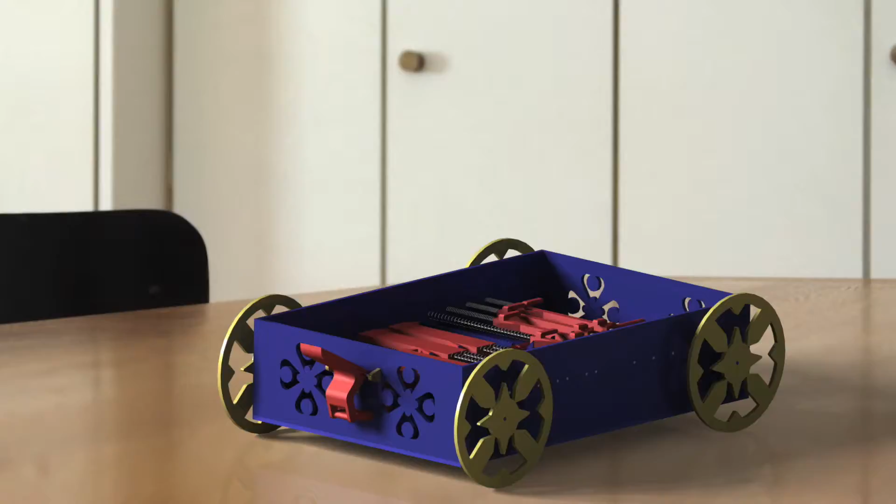Hi, I'm Daniel, and with my colleagues we will be presenting our concept vehicle for the mechanical experimental engineering assignment. The repeatable vehicle we designed will be powered by energy stored in a series of springs. The linear movement from the springs will be converted into rotational using the rack and pinion principle, with the pinion acting as a shaft for our car.

Since our shaft will be positioned longitudinal to the car, we will use another set of gears to transfer the movement to the wheel's axle. This explains the forward movement. Let's have a look how the car is going to do the return journey.

As you can see in the image, we are using a pair of springs for every rack that moves the car forward. In reality, only one spring per rack would be enough to push you to the target, but we are using additional springs to load the rack for the return journey. As the shaft rotates, it is pulling the single spring racks into the opposite direction of the first one.

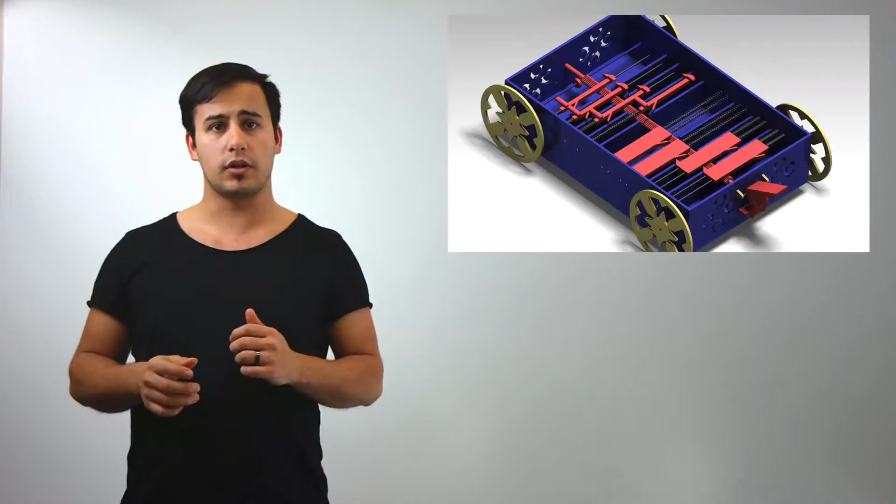You might wonder how does our vehicle know when it hit the target so it can return to the origin. Let's have a look at that. By now you probably noticed that the shaft is divided into two sections. One is for the forward movement and the second one is for the return. They are initially linked together by a gear, but there is a compression spring forcing the half of the shaft to separate from the other half.

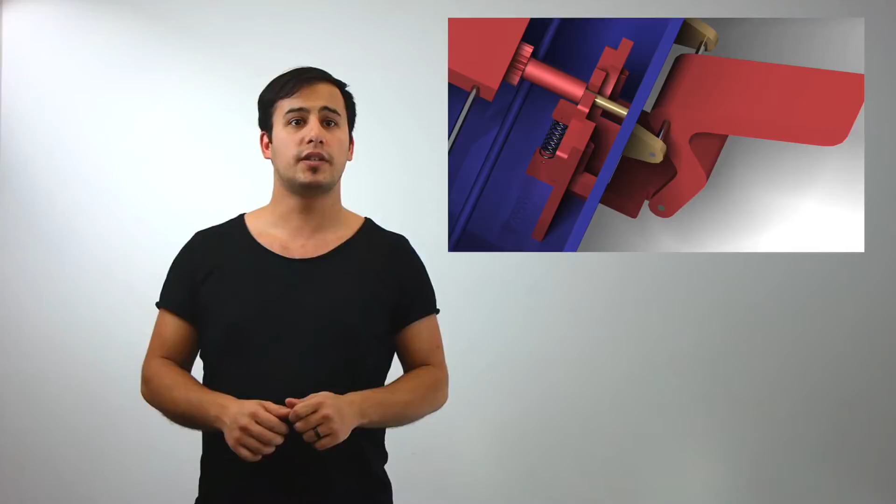The separation, however, is blocked by a small latch at the front. This latch is being pulled downwards by an expansion spring. Again, this downward movement is blocked by a release mechanism, which is activated when the target hits the wall. This means that when the target is hit, the half of the shaft driving the car forward is disengaged, leaving only the single spring racks connected to the wheel's axle, making it move backwards to the departure point.

Hi, my name is Luis, and I'm going to speak about how the forces are going to interact in our vehicle. Roughly, half of the energy stored in the forward springs is going to be used to move the vehicle to the other side. We have added a calculated efficiency of 80%. That is why we need some more energy in the forward side to compensate for this lost energy in the transfer.

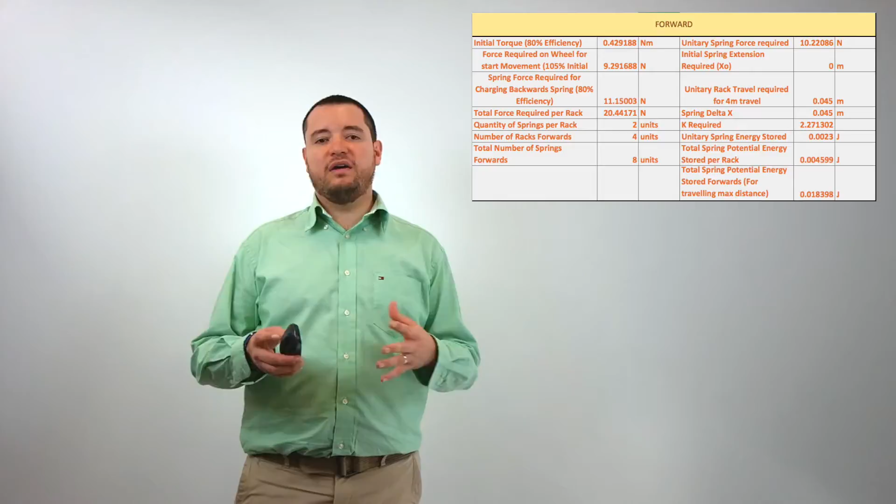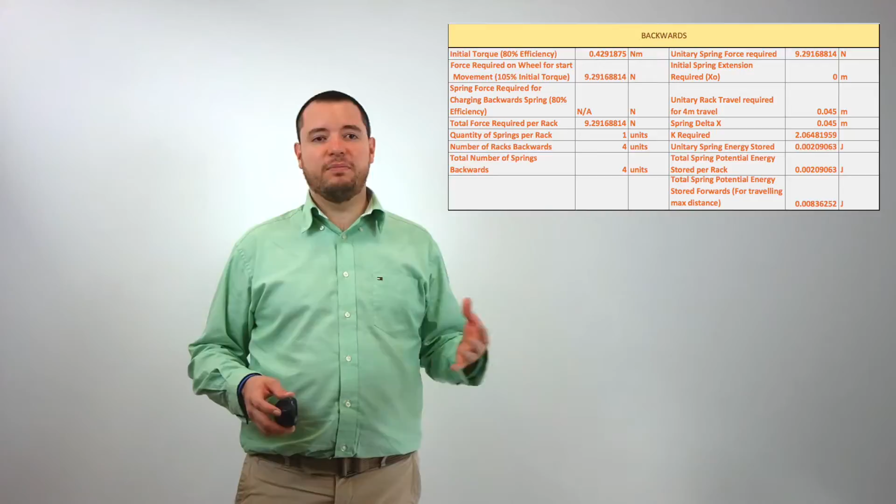Calculating the initial torque we need in both ways and the maximum distance we have to achieve, we have come to this table and made a selection of the springs we can use for the vehicle. Changing some of the variables in our database, we can achieve different distances in powered vehicles with different masses. With a connection ratio of 2 to 1 between the crankshaft and the wheel axle, we will achieve 2 turns of the wheel for each turn of the crankshaft.

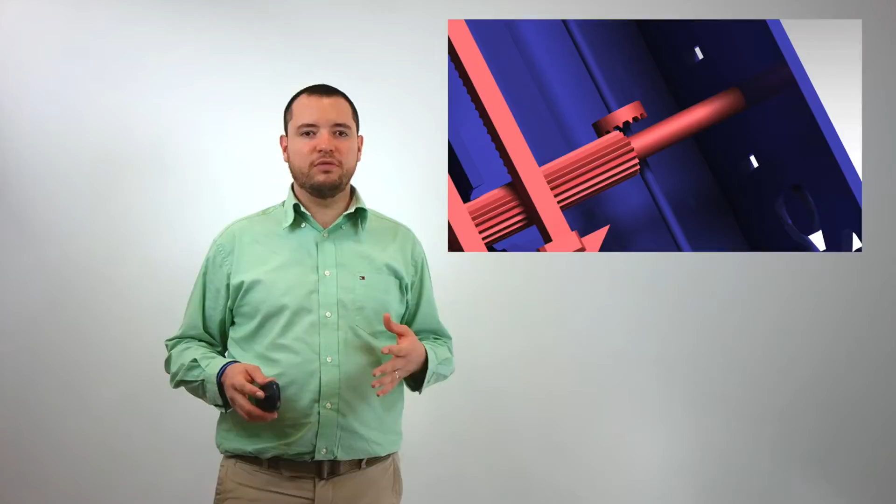Using mechanical connections and reducing the transmissions, we improve the efficiency of the energy transfer, which is the basic principle of our model. Once we can make a test in our model, we will be able to improve this efficiency and have more certain calculations.

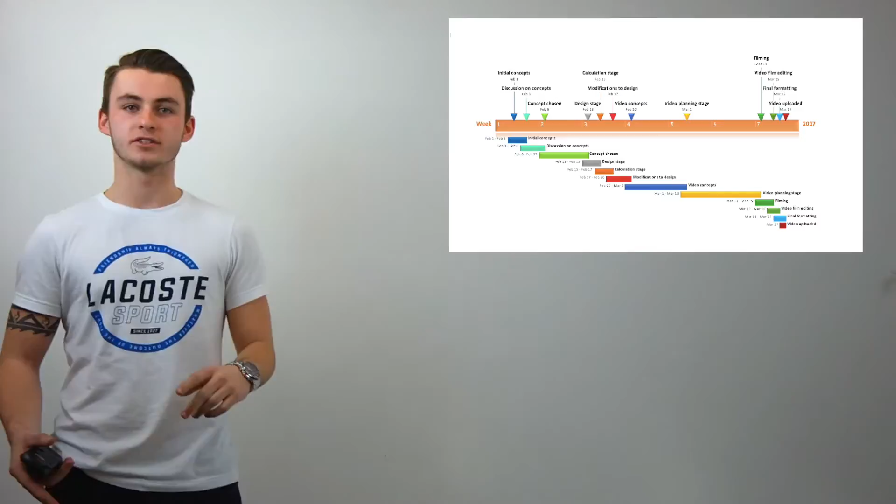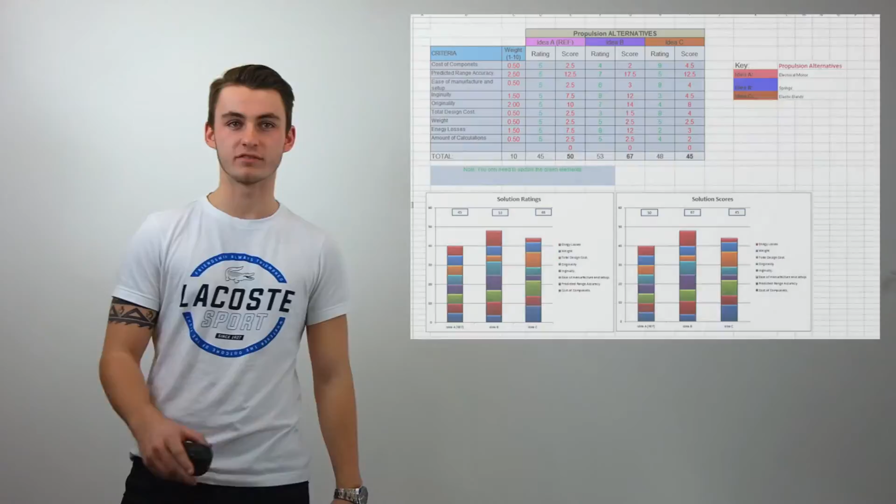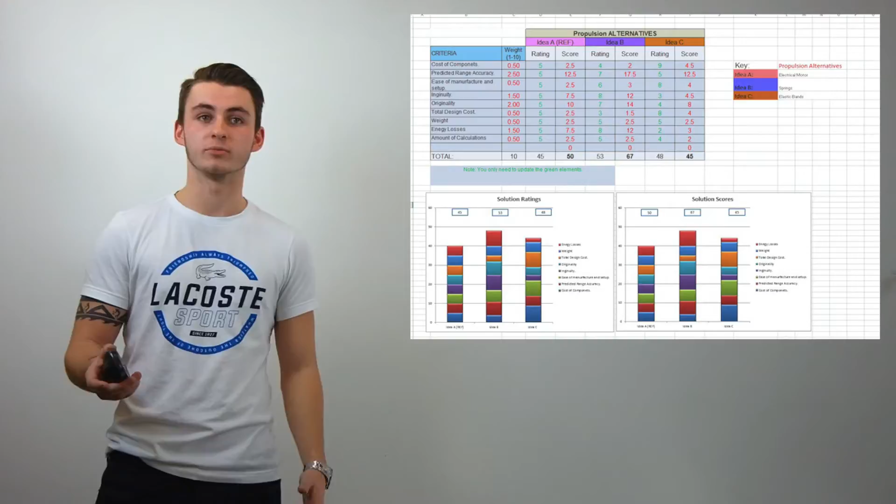Hi, my name is Elliot and I'm going to be talking you through the design selection process. In our initial brainstorm, we highlighted 3 possible means of propelling our vehicle. Our options were to use an electrical DC motor, the elastic potential energy in springs, or elastic bands. In order to determine which method would be the most effective in relation to our design brief, we discussed advantages and disadvantages as a group, allowing us then to make a selection table that can be seen behind us. That's allowed us to compare each method to a set of criteria which came directly from our brief.

And as you can see from the results, the method of propulsion that was calculated to be most effective was to use springs, because of its properties allowing controlled release of energy with accurate calculations, enabling us to achieve our set parameters. Using elastic bands would have provided an erratic and less controlled release of energy, which would result in reduced efficiency due to energy losses.

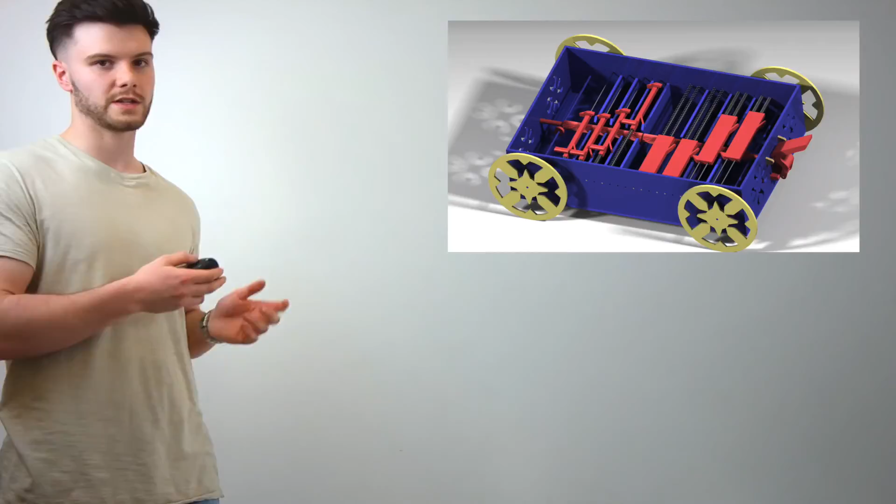We decided against the use of an electric DC motor, as even though it would be simplistic, it would remove the ingenuity and design that could be achieved with a complex mechanical system such as the one that we have designed. From our research, we came to the conclusion that using springs for propulsion was the best suited method, as there is very little energy loss. Furthermore, the potential energy stored can be easily controlled.

The means of using a spring-loaded rack and pinion assembly allows the potential energy to be converted into rotational energy to drive the vehicle's wheels. The release of energy can be controlled by using different spring rates, and in the example of our design, the potential energy is released at different stages to aid in controlling the rotational speed, as well as the torque transfer to the rack and pinion.

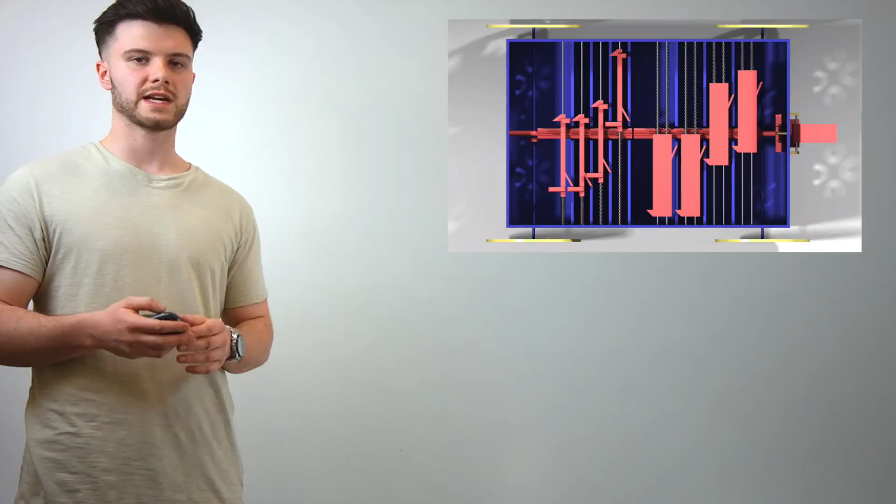This design also allows the springs for the secondary stage to be loaded as the vehicle is travelling forward. The rotational energy of the drive shaft is converted into elastic potential energy as the secondary springs extend. Once the vehicle has made contact with the outer boundary during the experiment, a switch will disengage the primary section of the drive shaft, propelling it in the opposite direction towards the starting point.

One of the features that we needed to consider when designing our vehicle was the cost. From the assignment brief, we are given a budget of £25 for all the components and manufacture of our vehicle. For the main body of the vehicle, including the wheels, we are going to use 3 mm thick acrylic.

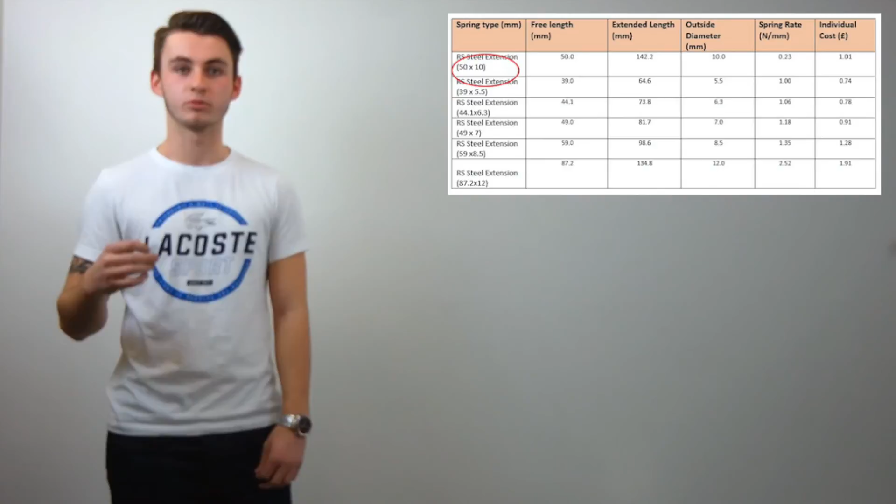We used the table shown next to me in order to decide exactly what springs we wanted by comparing the spring rates and the total extension. Each spring is then supported by a 2 mm steel rod, and the wheel axle is 3 mm acrylic rod. Altogether, the cost of the design was £24.30.